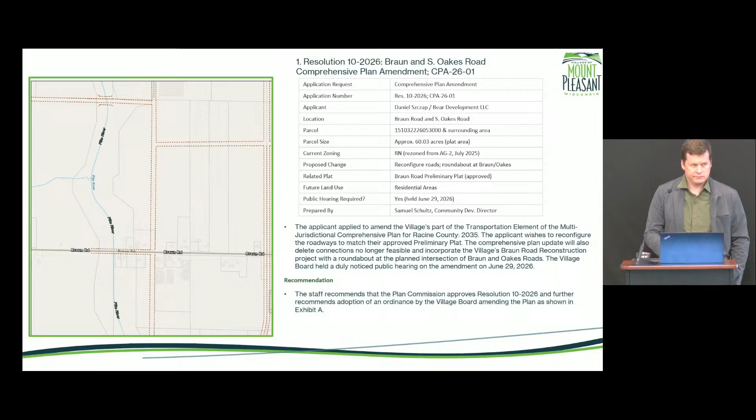If the previous proposed roads layer, which is the slide before this one, already had one connection through, and there would be their proposed other ones. I've been trying to reach out to him to explain that the comp plan isn't saying that those roads are going to go through; they limit the development that can occur on either side of his property rather than actually mandating anything going through that property.

As well, we need to have those on there to make sure the roads connect in any meaningful way. But I also noted at that meeting that the reason we adjusted some of these things is because the traffic impact analysis done for the Bear Development Project assumed Biscayne would be connected through Mr. Kramer's property. Some of my adjustments remove that assumption from the table, because it's just not probable that connection is going to be put through anytime soon.

So I basically acknowledged that as the hearing was going on. That was the only meaningful public comment on this particular comp plan amendment. Thank you, Robin.

I think that's important to reiterate. For the property owners who don't have impending development plans, this is the long-term comprehensive plan. Adding more detail to this plan actually protects them, in our opinion, more thoroughly than if we don't, because if there are no plans, developers have more free rein to stub or not stub roads into their property, which could limit their future development.

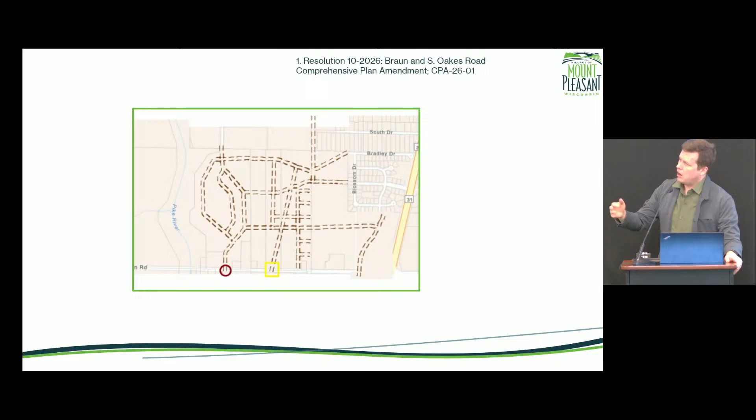So in lieu of that, we have those cross connections, which limits their exposure to that type of issue in the future. Same thing as you move to the properties east, you can see where we've ghosted in some of the stubs. For larger properties that have more flexibility, even if something isn't shown on the comprehensive plan transportation element, our underlying land division ordinances still have standards for lot and blocking. So we have a belt and suspenders approach for land division and future developments, which we base our future roadway layer off of.

But it's kind of a balanced test for us of what needs to be on the plan to make sure those roads go in for development in the future, or at least are the assumption from developers, versus larger properties where we're more open to development-dependent configurations.

As the comprehensive plan states, there are a series of questions that you all and the village board need to answer to amend the comprehensive plan. Is the amendment consistent with the goals, objectives, and policies of the plan? We believe it is, and the applicant has put forward some of their justification as well.

We do not believe the amendment will lead to any detrimental environmental effects. Again, most of these roads were already on there, and they would have to go through proper DNR and local permitting to be built in the future.

We believe the proposed amendment is compatible with surrounding land uses. All of these properties are planned in the long term for residential development, so we've set up the roadway network to support that.

Existing local and county facilities are adequate to serve the type of development. Yes, this would both complete an unfinished road network and correspond to that village planned project to upgrade Braun Road.

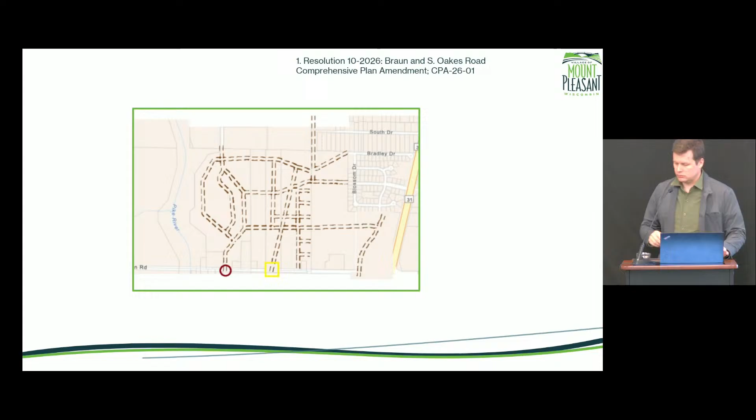Chairman? Okay, yes, go ahead, Nancy. Can one of you point out, I don't know if we can do arrows on the screen, but which property is the Kramer property? In other words, in regards to the yellow box?

It is the one kind of west of the yellow box, immediately west. So the yellow box sits on what was the Cardinal property, and then to the west of that, there's kind of a long and skinny one. There's just three horizontal roadways crossing it.

That is the Kramer property. Okay, good. And then the properties that have all the extensions to the east, further east of this, that's two over from the yellow box. Do we know whose property that is? It's privately owned. We've never received any detailed development plans regarding that property, which is one of the reasons why it has less detail to it than some of the other ones.

I think that's Wilkes then, okay. Yeah, I believe you're right. I think the Kramers are in an interesting situation, but I think we've done a good job of making sure that we can connect through there, and at some future point it will be of value to them.

Yeah, exactly. That property could not develop for another 20-30 years if they so chose, but it would be set up so that it could in the future. So it'll ultimately be their decision one way or another. Yeah, exactly. The clarification is that it's more not a restriction, but guidance for those two other big property developments to make sure that those Legos fit eventually.

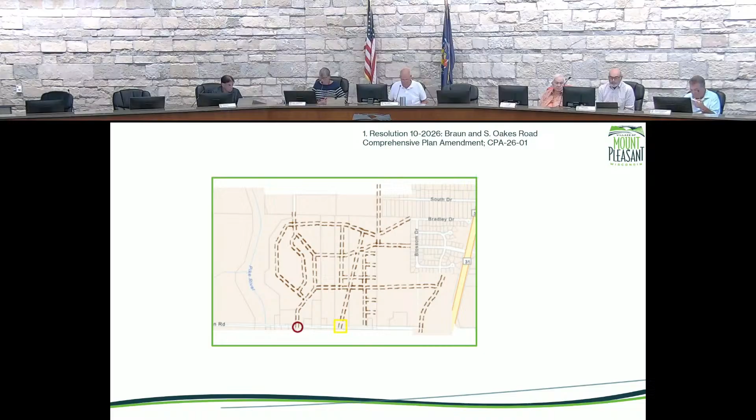Mr. Chair, Nielsen, Madsen, and Barber applied on behalf of Amy Hamilton to amend the village as part of the transportation element of the multi-jurisdictional comp plan for Racine County 2035. They wish to reconfigure the roadways to match their approved preliminary plat. The primary changes are the removal of the east-west connection of Apollo Drive through a developed home parcel and the removal of its connection eastwards on South Emmertsen Road. The remaining proposed layout remains largely the same.

Answering all those questions, we believe the proposed amendment is consistent with the goals, objectives, and policies of the plan. This revised layout successfully addresses connectivity requirements by streamlining the previously excessive points along Emmertsen Road, but still maintains and improves regional traffic flow by correctly aligning Mariner Drive and Kinsey Avenue. We do not believe the amendment will lead to any detrimental environmental effects.

The proposed amendment is compatible with surrounding land uses, which were all planned for residential. This would complete an unfinished road network, and the subsequent plat also provides the estimated housing units previously cited under the Racine County Housing Report. This does comply with the regional land use plan. These are small local roads which are not actually shown on the plan, so we have full local authority to show them how they are.

As a note for land division, the village board approved the Lineage Estates preliminary plat, which matches the proposed roadway connection shown here for the northern properties. The application meets the village strategic plan, and all of the proposed lots and roads comply with the RL low-density residential zoning district. We do not believe there's any fiscal impact to these changes, and we recommend approval of Resolution 11-2026.

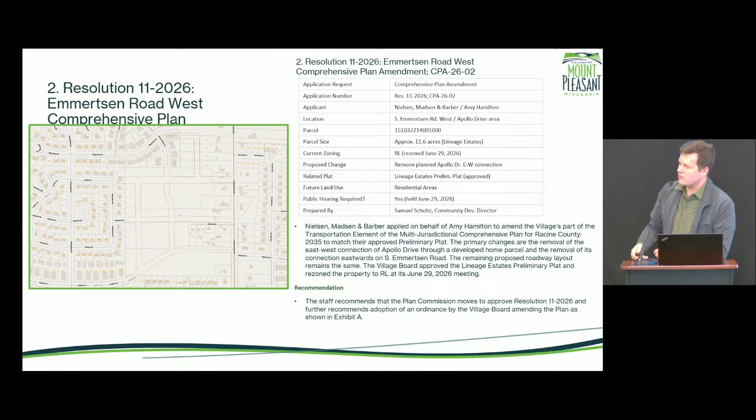Just like the extension of Apollo on the west, they platted a subdivision and there's a house right where it should go. So obviously that transportation element at that time wasn't being looked at, or was different, or they ignored it. So this kind of cleans it all up. It's not perfect if it were all a big open space, but dealing with what we have, we think this is a nice refinement.

I did get some calls after that meeting with concerns over a lot of things, and it was a very good meeting. I think we had some really good dialogue.

The thing that happened at the village board meeting, from my perspective, this roadway comprehensive plan amendment is a very good one. For the reasons you've stated, we're looking at some areas that'll never extend because they don't have the land available anymore. This is an infill site, so it's really important to adjust infill locations as time goes on and things change. But the thing that was said at the meeting was said by Chris Smith.

We all have concerns about how this is going to be built, and the residents are fully aware and watching us, paying attention to agendas, and are going to be vocal as we move through the platting process with that project. In the meantime, the developer has made certain comments or promises that we're not sure he's going to keep, and there's a little bit of mistrust, but that has nothing to do with this plan, as Sam mentioned.

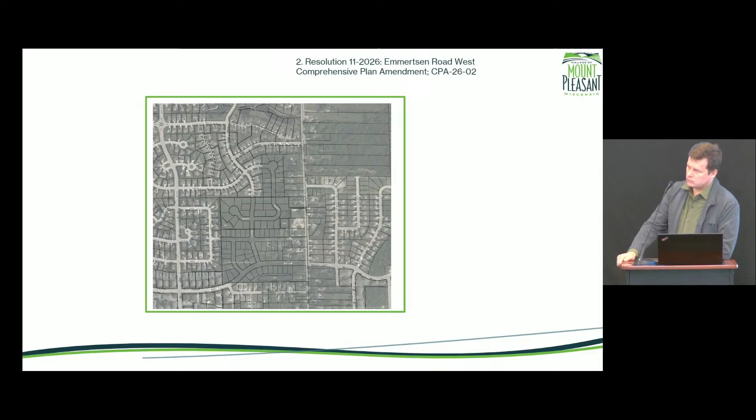So we do have some things to work out that I think particularly some of us will be paying a lot of attention to. But as far as this comprehensive plan amendment goes, I think this is a really good one for the area, it connects the infill areas, and I support moving this forward so they have a goal to meet as well as they're looking at final plat, constructability, and how they can diffuse some of the concerns from Pheasant Creek and the Green Valley and Kingsview residents. So I do support the resolution.

Yeah, and it really opens up the east-west corridors too. That's key, much needed too.

Nancy mentioned earlier with respect to the previous item, and when I looked at what we have on the map, I really have to go through the amendment plan, the write-up, and this to try to understand what you're proposing. Can we put some kind of arrow or circle to show that's the amendment we are proposing? Because this, which is right on the plan, makes it very hard for me to understand. I would like to have a little bit more - put an arrow or circle saying that's the amendment or that's what we are proposing, because other than that, I listen to the comments and concerns by Trustee Washburn, since she is more experienced than me on the issue, but I really have to go through that to spend a lot of time trying to understand.

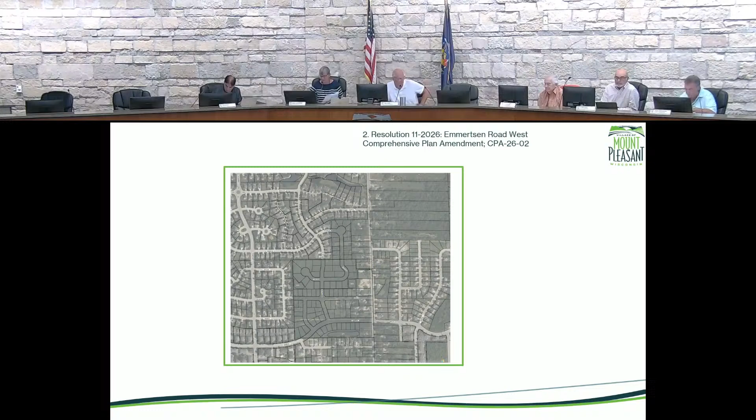Resolution 11-2026, recommending amendment to the comprehensive multi-jurisdictional plan, for the transportation element of the comprehensive plan, CPA 2602. Second. Okay, we got a motion and a second. All in favor? Aye. Opposed? Passes unanimous.

And let's see here, last one is new business, 5940 16th Street, Certified Survey Map, CSM 26-05.

Robin: the applicant submitted a certified survey map for the existing multifamily residential property at 5940 16th Street. The CSM divides the existing 1.971 acre parcel into two lots. Lot 1 contains the existing apartment building and accessory garages, and Lot 2 is located along South Emmertsen Road.

The purpose is to develop the newly split property. So when you're looking at this, I should have put up a map with an aerial image. But essentially it's the lot division as shown here. Lot 2 is basically the area between Emmertsen Road and that access drive.

So the point is to develop that with the construction of a new building. This proposed CSM does not approve any new construction on that property, which would be subject to village staff review. The application follows the land use element. The property is already zoned RH for high-density residential, and does not change the use of the property.

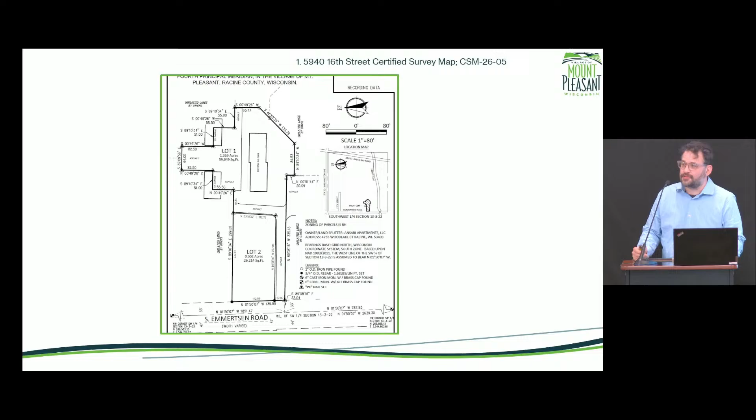And that is really it. Almost everything is there already, and it's a lot simpler than I thought it was going to be when I first got this across my desk. So, any questions? We recommend approval.

Robin, could you switch back to the other screen? Thank you. Larry, grab your mic there too. Thank you. Was my mic off? No. Oh, okay.

I don't have any comment, actually. I'm looking at the aerial now on Google Earth, just comparing it from what I can see. What's wonky about it is that Lot 1 of the CSM—the legal description for those two existing buildings has to be really interesting because they sit over multiple lots. They sit on what will be Lot 1 of the CSM, so how does that work? I think we need to bring in some attorneys to answer that one, but it's pre-existing and it apparently works.

And it doesn't affect this newly created lot, which is about as clean as it gets. This lot also could have direct access on Emmertsen. I don't suppose it will, but I don't know how all of those shared agreements work with that existing lot and the existing building.

So on the certified survey map, the signatures required will be Nielsen, Manson, and Barber, the seller, and the village. So my question is to our fellow plan commissioner, Tosh, how does that work in terms of title? If there is a building on an existing lot, and in this case those buildings are on multiple lots, and now part of one of those lots is going to become Lot 1 of a new certified survey map, would the lender have something to say about that?

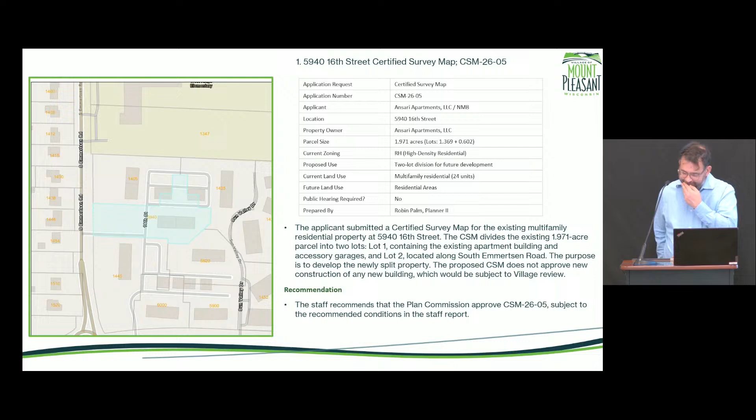Right. Nancy, I don't see how many of the easement statements and restrictions on Lot 1 will actually affect Lot 2. It won't affect Lot 2. It won't affect Lot 2. So I apologize, I might have done what I typically do, and that is overthink it. I took it too far.

I never have that problem, Nancy. But the only comment I would have, if we can make sure under the village's certificate that we have the proper information. Cool. The clerk's information is incorrect.

Okay, I guess my question would be, are they doing this to sell it? Or is it just to be able to put another building on it? I believe the intention is to sell it. Yeah, because again, he wouldn't be able to do it if he didn't clean up that. He has to divide it in order to be able to put something on that lot, I would guess.

I mean, it's a lot easier in any way to kind of separate it out. And if there are restrictions to other owners on the current lot, dividing this lot out would relieve you from some of that burden.

So I always thought this was all just one big community, but you're saying most of these are individually built? It's an absolute mess. I did not know that. It is kind of wonky over there. I started poking around all the parcels, and it does look like one real community, but it's not. It's all different owners, and I think one section is actually owner-occupied condos, where each one has their own lot number.

Okay, I stand corrected as well. On page 4 of the CSM, there is a party wall agreement taken off the title policy. So it would appear that the agreements regarding the garages are in place, without reading the document, which I'm not going to do.

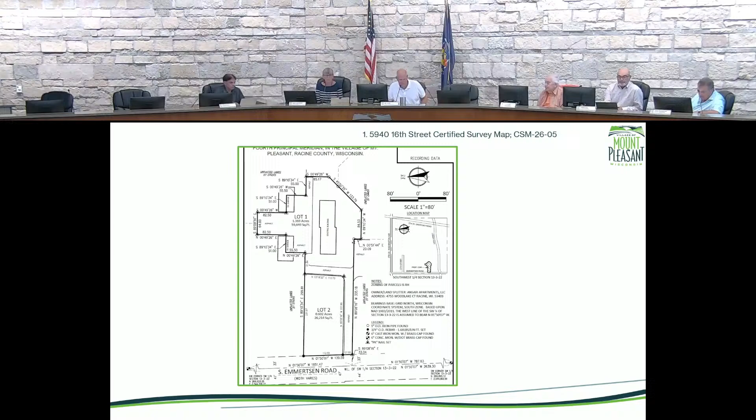Okay, on that then, I'm looking for a motion. Mr. Chairman, I move to approve Resolution 5940, 16th Street, certified survey map CSM-26-05, subject to the recommended conditions. Second. Okay, got a motion and a second. Any other comments? All in favor? Aye. Opposed? Passes unanimous. All right, and we have no staff reports.